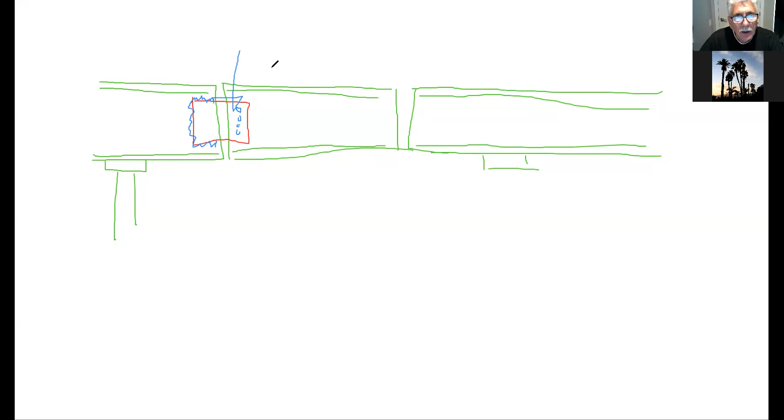So the first thing we do is we try to determine how many bolts we will need to connect the beam to the plate. So we know that we have a VF force of 333 kilonewtons. And if we assume that we're going to be using 3/4 inch diameter A325 bolts, and that the threads are going to be intercepted, then if you go to the table, the VR for this is 79 kilonewtons per bolt with threads intercepted.

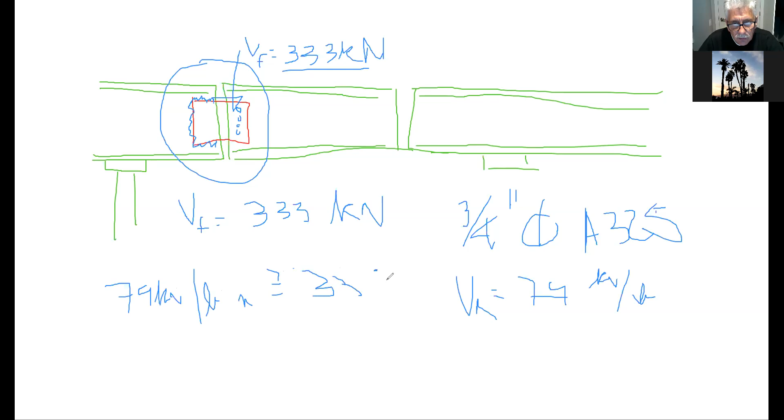So therefore, if we have 79 kilonewtons per bolt, and N is the number of bolts, N times 79 should be greater than or equal to 333 kilonewtons, so N is going to be 333 kilonewtons divided by 79. And I did this and I got about 4.2 bolts.

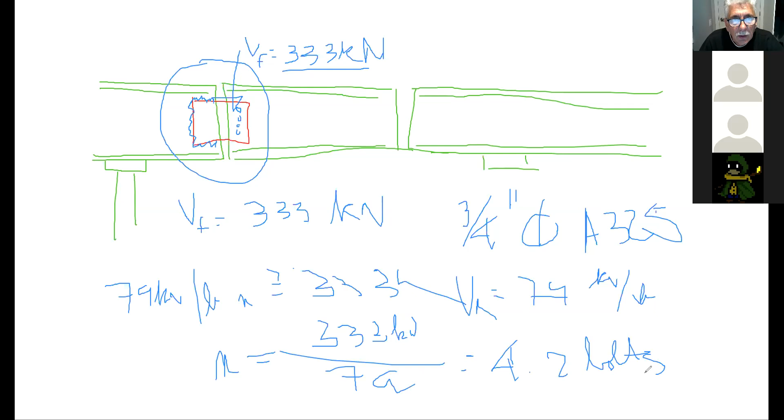Sir? Yeah. Can you tell the numbers again, because I can't really read what you just wrote. Well, as I'm writing it, you should be writing it down also. I know, but I don't really.

Okay, so in other words, this is my VF force at the end of the beam. That's the highest one, 333 kilonewtons. We're going to be using 3/4 inch A325 bolts. The VR, if you assume that the threads are going to be intercepted, because you're not sure, is 79 kilonewtons per bolt. So if I want to determine how many bolts I need, I take 333 kilonewtons divided by 79 kilonewtons per bolt, and I end up getting 4.2 bolts. So I'm going to use at least 5 bolts, a 5-bolt configuration.

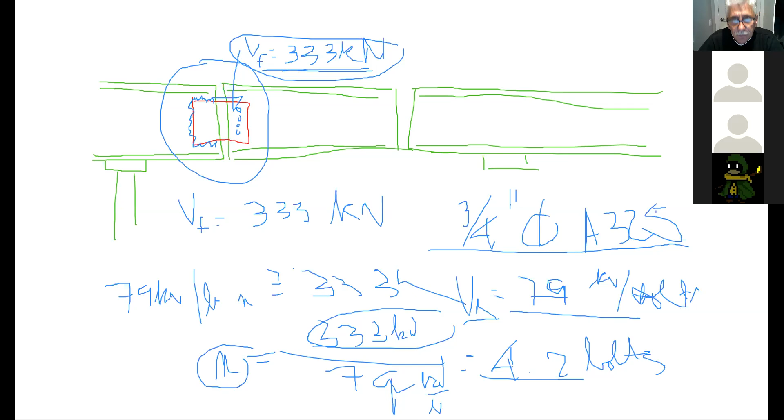Right. Okay. Now I'm going to erase all of this. So now the next step is working out some kind of plate size. I'm going to try to draw this. Sorry? So there's 5 bolts on the plate holding it? Well, we're going to be putting 5 bolts to attach this beam or this girder to this plate.

Now I'm going to try to draw this. What color should we draw it in? Let's draw it in.

Sir, is that going to be the same for either side of the drop-in beam? Yeah, whatever I design for this side will apply to this side, because the VF on this side is just slightly higher than the VF on that side. So I want to get the VF right across the whole thing. I took the highest VF value of 333. So whatever I'm designing here is going to be the mirror image on this side, and whatever we're doing here, we'll be doing on the other end, the other side of the girder. It's all going to be the same.

Thank you. Okay, so now I'm going to try to draw this so that we can refer to it quite a bit. So I'm going to try to draw this. Okay, so this here... I should have made this a little bit longer.

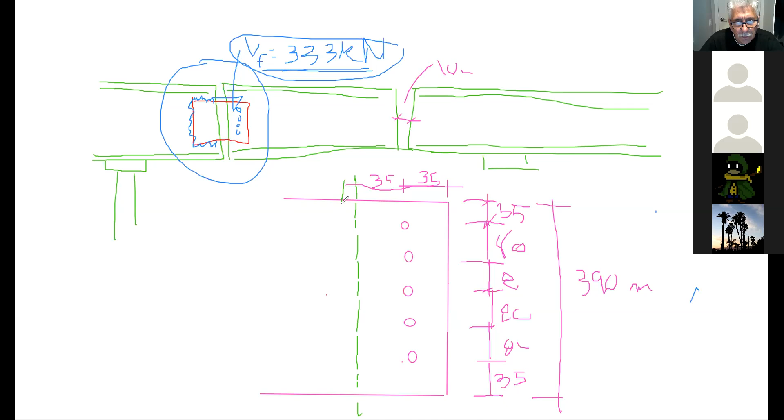And of course, where the beam is going to end here - I should draw this in another color, green, so it's consistent. So where this beam is going to end here, and here, so on, okay. So here I'm going to leave another 35 millimeters. Now the standard distance you leave between these two things is about 10 millimeters. So I'm going to leave 10 millimeters to the edge of the next beam - here's the next beam next to it.

And this, guys, is a question of choice - there's no real rule. So I made this length here 80 millimeters.

Sir, I'm having trouble visualizing what that green dotted line is. That's the edge - sorry, I should use green with green. This line here represents that line there, and that line there represents that line there. In other words, that's where the two beams are next to each other, and this plate's going to be connecting the two beams together. Okay, thanks.

So now what I have here is I've got one dimension, and I've established the other dimension. Now what's going to happen here, I'll do this in blue probably. How's that?

Sorry, sir - that 80 millimeter that you just drew, until the end of the plate, like until the end of the weld? That's what I'm getting at. So this is going to be completely welded here, until the end of the plate. This is a weld here, so it's all welded up to the end of the plate here. Let me go back to green so you guys can see - remember this here, okay?

With this, I can start determining, based on the fact that I have to transfer 333 kilonewtons, what size of weld I need here in order to resist that 333 kilonewtons.

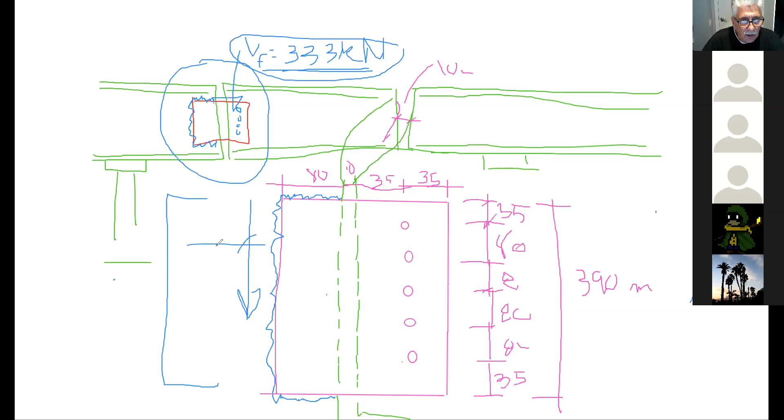So you've got all kinds of different ways that this thing gets subjected to forces. What the handbook does is give you a very nice table on how to calculate what this weld size has to be based on your geometry and all that. That's what I'm going to show you now.

I'm going to stop sharing this. Mind you, this is going to be messy. I'm going to show you something, I should have sent you this but I sent you only one.

Okay, so this is one of the pages in the handbook. This shows a whole bunch of different weld groups. Here's one of them, let me get to it.

So here, if you can determine, for example, what we have right now is this value from our geometry. We can determine the value of K, because we know this length here. We know from our geometry that we have a length of 80. I'll do it here, it's better, and I like to change color.

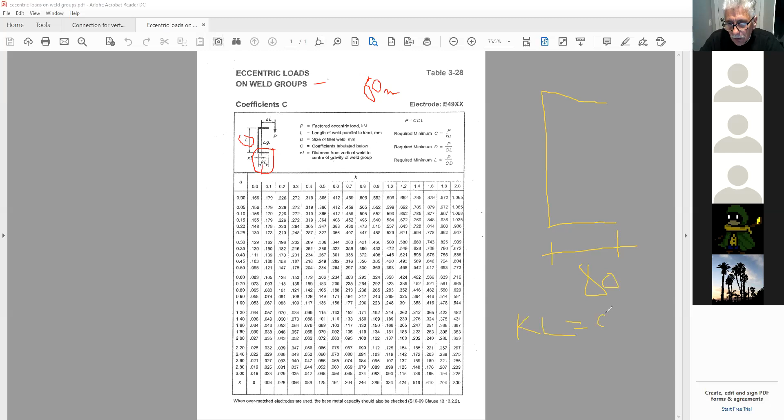I made it 80. Now from here, I know that KL is equal to 80. In other words, it's equal to this dimension here, and this is 80 millimeters. L, of course, is the length of my weld, and that was 390. That's where we figured out the length of the plate, the height of the plate, 390. So K times 390 millimeters is equal to 80, and therefore I can determine my K value. So K would be 80 millimeters over 390 millimeters, and it's just a ratio.

If I do the math on my calculator, 80 divided by 390, I get approximately 0.205, but let's say we have 0.2 for K. So that means here are all my K values, let me just change color. Here are all my K values, and I have a K value of 0.2.

Now if you go to the bottom of the table, it tells you what the value of X is at the bottom of the table. So once you determine your K, you go to the bottom of the table and you get your X value.

Once I got my X value, it's going to allow me to calculate this little distance here. Basically, if I want to calculate where the centroid of my weld group is with respect to the edge, that's going to be X times L. So to calculate this little distance, X times L is equal to 0.029 times my L, which is 390 millimeters. So that little distance from the edge to the center of gravity, X, is going to be equal to 0.029 times 390. So my X value is going to be about 11.3 millimeters.

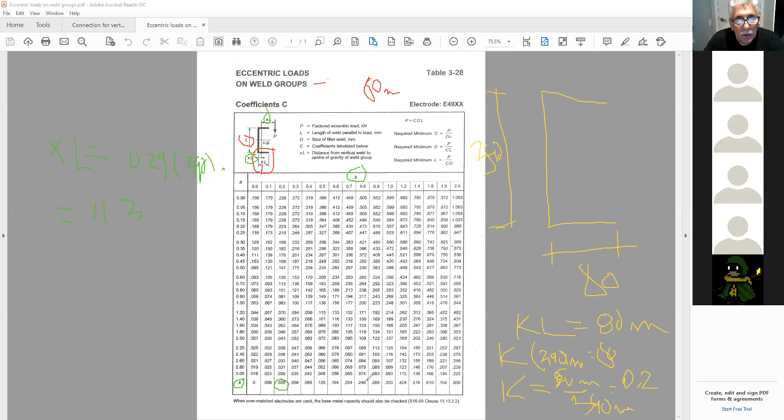I think it's supposed to be 113.1 instead of 11.3. It can be—0.29 times 390 gives you 113.1. Oh, it's 0.029? My bad, I didn't put the first zero. But if you look at the bottom of the table, it's 0.029. It couldn't have been more than that anyway, since it cannot exceed this length here—right now we only have 80, so the center of gravity of this group cannot be out here somewhere.

That's number one, good, thanks. Okay, so 11.3. Now that I've got that, 11.3, I can go and calculate my A. How do I calculate my A? Well, it's very simple—I look at what I had in terms of overall length.

This is my force P. I know that I left 35 millimeters there to the edge of the member. I had 10 millimeters between the two beams, and then after that I came over a total of 80 to the end of the plate. We all agree? So therefore, what's my A value?

Okay, so my A value, I'm going to do it up here. A would be equal to 80 plus 10 plus 35, minus 11.3—in other words, I'm taking away a little bit from there. So I get 80 plus 10 plus 35 minus 11.3.

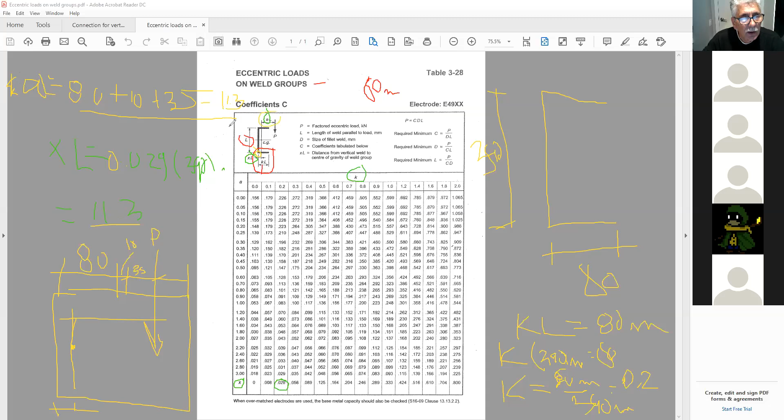So A is the distance from... No, you're calculating A—you're trying to calculate this length here so you can go and evaluate your A. So right now, this is what we're doing. I should have put LA here, or AL. AL is going to be equal to this value here. I'm trying to calculate this length, which is 80 plus 10 plus 35 minus 11.3. So that gives me 113.7.

In other words, the distance from the center of gravity to where the load is acting is 113.7 millimeters. Therefore, if I divide this by my L of 390, I get my A value. A is going to be equal to 113.7 millimeters divided by 390, which gives me approximately 0.3. It's actually 0.29, but I'm going to use 0.3.

Now that I've got my A value and my K value, I can go into the table and find my C value—that's what the table gives me. So here is my A value of 0.3, here is my K value of 0.2, and therefore my C value from the table is 0.196.

Now, if I want to determine the minimum size weld I need, I can take my P and divide it by my C and my L, and that will tell me what size of weld I need to resist that force. So to calculate my D: D is equal to P over C times L. That gives me 330 divided by 0.196 and divided by 390, which tells me the minimum size weld I need in order to resist that force.

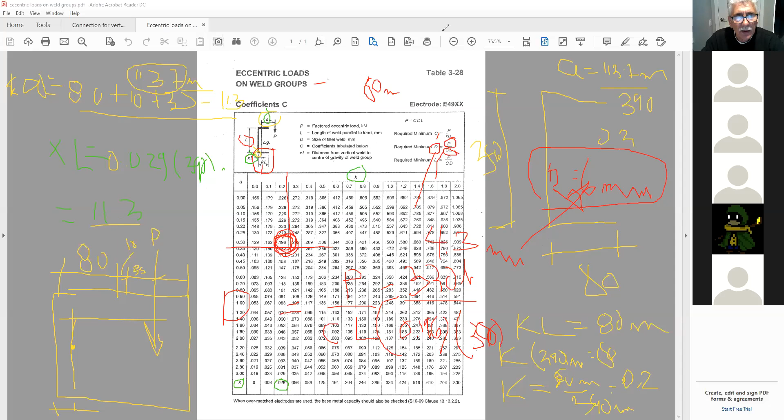I hope you guys have this all down. Anyways, it's being recorded. You'll be able to come back. If you don't, you can listen to me. So that's what I got now. Now I got my D. I'm going to stop sharing this. I'm going to clear this now. Okay. I'm going to stop.

Sorry. Yes. I just wanted to know, when you find your D, when you use your equation P over CL, the units aren't supposed to cancel? You're talking about this equation here? Yeah, like the units don't cancel? No, because this is in kilonewtons; these are empirical formulas, you understand? Empirical formulas that they develop by experimentation. The only time the units work out is when you're looking at these ratios here, A, K, because that's the only time the units cancel out, okay?

Okay. The C value is in kilonewtons per millimeter? Well, here it just says coefficients tabulated below, that's what C is. D is the size of your fillet weld in millimeters. So if you do it correctly, you'll end up getting a D size in millimeters. L has to be in millimeters, and P has to be in kilonewtons, that's what we've been using. XL is the distance of the vertical weld to the centroid. So as long as you're using all the correct units, our D here is going to be in millimeters. The table has been based on those units, okay?

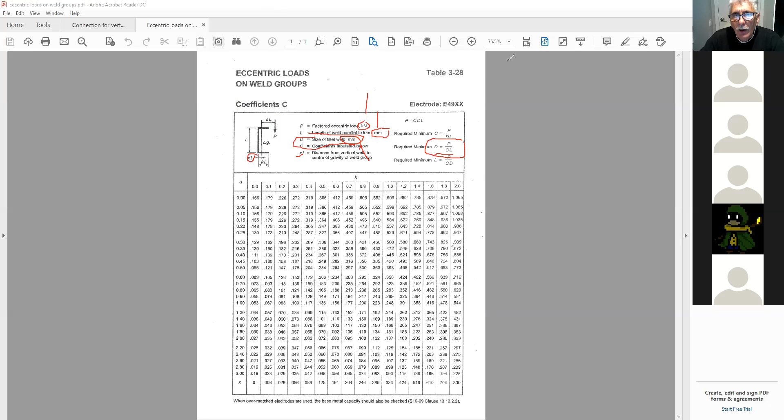So now I've got my D, right? Now I'm gonna stop sharing this. I don't need this table anymore. I know I need a D of 6 millimeters. Stop sharing. Let's go back to, where were we? Oh, did I?

Oh, I lost my drawing, right? I did that on the whiteboard, right? No, on the whiteboard here. Share. Well, here we go. There we go. Okay. So now, guys, we're back to this, and we'll use this to do our calculations. I don't want to redraw this. It's kind of hard.

So now, I know that D is going to be equal to 6 millimeters. And I know that according to good weld practice, D should be equal to the thickness T minus 2 millimeters. In other words, the weld size should be 2 millimeters thinner than the material that I want to use. So therefore, the thickness of the plate, T, is going to be equal to 6 plus 2. So I'm going to start with an 8 millimeter plate. So now I've established the thickness of my plate.

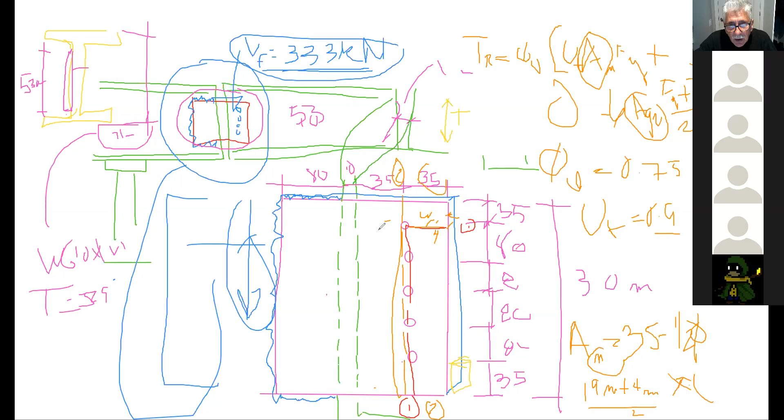Now, this length here is your value of AGV, your gross shear area, and basically that's going to be 80 plus 80 plus 80 plus 80 plus 35 multiplied by your thickness. That's your AGV. You put all the values into your equation, and if that TR value is greater than your VF value of 333 kilonewtons, then we know that this is not going to be a shear problem. So that's check number 1. Sir, do you mind repeating TR, please? If what?

Do you mind repeating TR, please? TR is the equation. In a sense, TR is phi in big brackets, U T A N F U plus 0.6. You find this in your notes, you understand? Yeah. 0.6 AGV times FY plus FU divided by 2. That's the formula for block shear, okay? So that's where you get that equation there.

Now, I'm going to erase some of this stuff that's getting very messy. Let me just erase some of this stuff. Okay. Now, after that, you're going to be checking for failure plane number 2-2, and that's basically going to be very simple because all you have is an AGV here for 2-2. So this can be very easy to do.

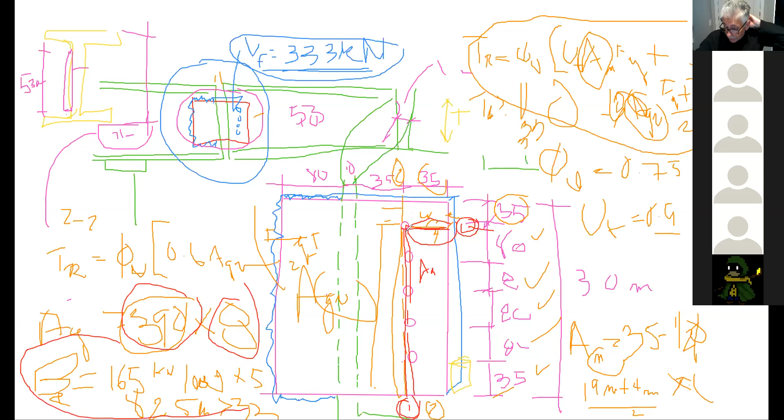Okay, do you mind going through the calculations again? Because I can't read it. Well, you're going to get the video, you're going to listen to the video. No, but sir, even if I go back and watch the video, I still won't be able to read your handwriting. Oh yeah, but what you do is you start the video, you listen to my voice, you stop it, you write down the value. Okay, never mind. Is that okay? I mean, which numbers do you want me to go over? I can go over any number you want. It's just that it's very hard to write with the mouse, you understand?

What's the value of FU? Well, if it's 300 FY, the FU is 450. All right, thank you.

Now, Jared. Okay, so is there anything you want me to go over right now? This way I can clear it up for you, because I know it's a little bit messy. No, like go over your notes and tell me which parts you don't have, and we'll fill in the gaps. I guess just TR for section 2.2. If you could just walk through that one more time.

Okay, in other words, for this one here, right? Yes. Well, look, Jared, I'll try to make it a little bit neater. It's just like I'm trying to get through it. Okay, don't worry about this. We have time. So let me erase this here, okay? Like the equations, unfortunately. So you want me to go for 2.2 here, right? Yes. Okay.

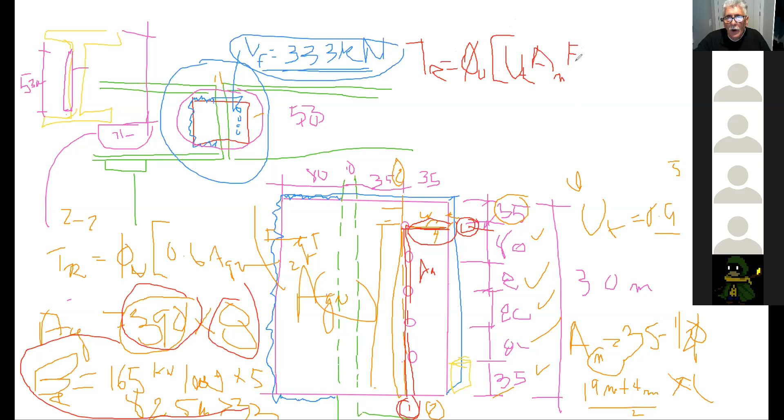So first of all, Jared, when I have block shear, it doesn't matter how it's going to block shear out, but the equation is TR for the block shear is equal to phi U, big brackets, utility factor UT, AN, FU, plus 0.6 times AGV, FY plus FU over 2. Do you recognize the equation?

Yeah. Okay. So what this equation does is that when you have block shear, in other words, when something can pull out as a block, the first thing you have to worry about is which side of that block is in tension and which side is in shear. So for example, if this is being pulled out here, then this side here is being pulled away, so this becomes tension. Since this is tension, it's only this side of the equation that contributes to the resistance.

Here, because it's being pulled here, I have shear here. I'm going to change color for shear. Let me just erase this. Okay, so here what's going to happen is I have shear, and so the material is resisting in shear. So once I can calculate this length here and this length here, it's this side of the equation that contributes to the resistance. Is the equation clear now? So this is for all the segments that are in tension. These are all the lengths that are in shear.

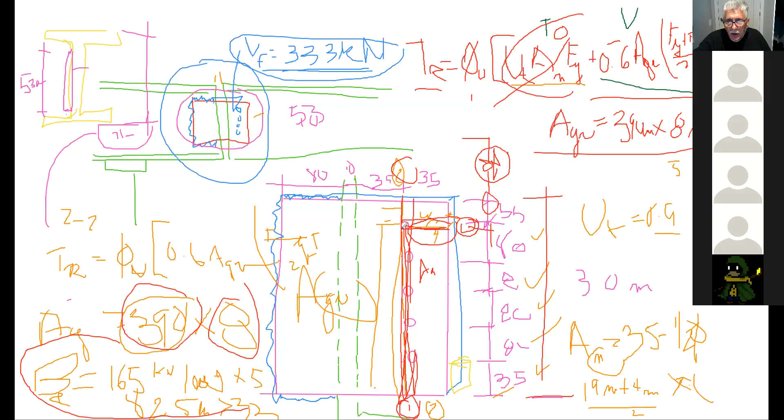Did you understand? Now do you understand why for 1 we add this little part here, because we have a little section of that block shear that will be in tension? Yeah, and that's why we have this little section here. So when you look at this equation, first you determine which segments are in tension, which are in shear. That's the first thing you have to determine. Then once you see that, you can plug in the values into the equation, so you'll know what to calculate for AN and what to calculate for AGV.

Okay, thanks. Yes, next question. Just want to be sure, but we chose the FY to be 300 MPa, right?

In this case, the plates are still being produced in 300 MPa, so you use an FY of 300 MPa. Thank you. As a matter of fact, the beam's going to be 350, so it would even be higher, so I'm not worried about the beam failing in shear. So should I stick with 300? Yeah, because you're always calculating for the weakest element in your connection. In this case, it's not the web, it's the plate itself. Oh okay, I see, all right.

Okay, thank you. Okay, so is that clear? You got everything here? Because what I did after that—okay, I want to talk to you about the other connection. The other connection I want to talk about today is, of course, the connection you're going to have to make for that vertical brace. And I sent you guys a PDF through Leah, but I'm going to pull out the PDF. Okay, I'm going to clear the drawing. Stop sharing.

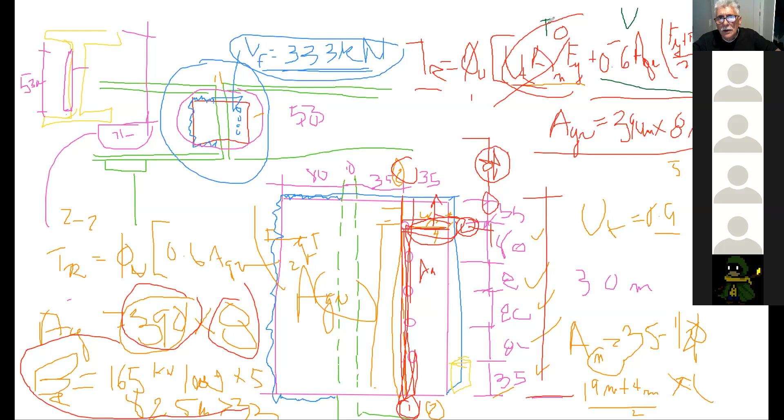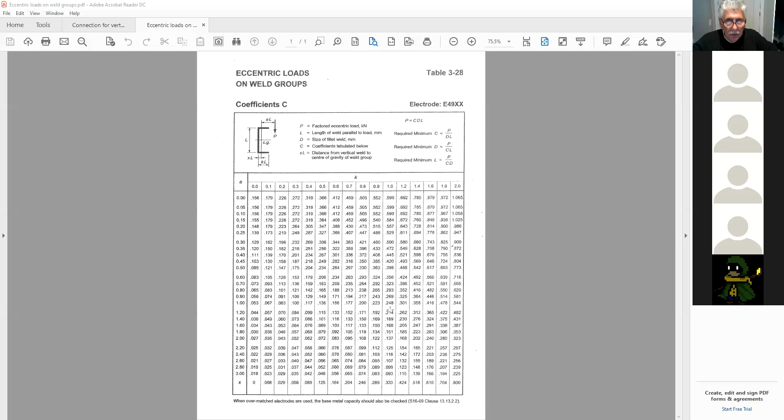Okay, where's my PDF? There's my PDF. Now, this is what I sent you guys through Leah. This is the example that I'm going to go through with you guys so that you know what to replace in here. But this is what you're going to have to do.

Let me try to draw this so you guys can relate to this diagram. Okay, so remember we calculated the two vertical braces here, and you guys were supposed to have sized them already based on the fact that this was in compression and you had a length here of so much. And somebody told me—does anybody have the size of the HSS for their brace here?

If you don't, well that to me is very secondary. That's something you're going to have to go and determine. So here, this is your HSS, okay? Not this one here—what exactly are you doing right now? This is the braces, the vertical braces for the building. In other words, you're going to have to be able to connect these braces to your structure. You want them to work together.

So I'm trying to show you how—this is the example you're going to use to be able to do that, and you've got all the information. We've done everything in class. So here I'm just giving you the steps, like this is a good example. So for example, if this is your HSS that you're going to be putting diagonally, the vertical brace that you're going to be putting diagonally to brace your building, what they're saying is that you're going to have to put a plate in here like this, and then that plate is going to be joined to another gusset plate that you're going to be welding to your column here.

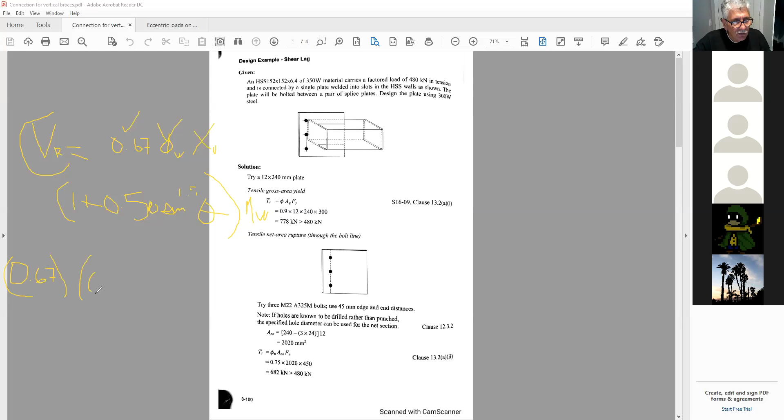The phi W is also 0.67. That's the reduction factor for welds. The XU is 490 MPa, that's your XU. This term goes to 1 because the sine of 0 degrees is... well, this goes to 0 here, therefore this only becomes 1. If I do sine of 0, that's 0, so this goes to 0.

I have 1. And here the Mw is very simple, I don't have a weld group, I only have a weld there and a weld there, so this goes to 1. So that's the value of the weld per millimeter, okay?

Oh yeah, sorry, the area of the weld, I forgot the AW. Where's my AW? Okay, now what is AW? It's very simple, I forgot the AW. I got 3 millimeters there, and therefore this is the area of the weld. Therefore that value there is...

0.707 times 3, okay? And that gives me times, of course, the length L, okay? And that's what you want. This is per millimeter weld.

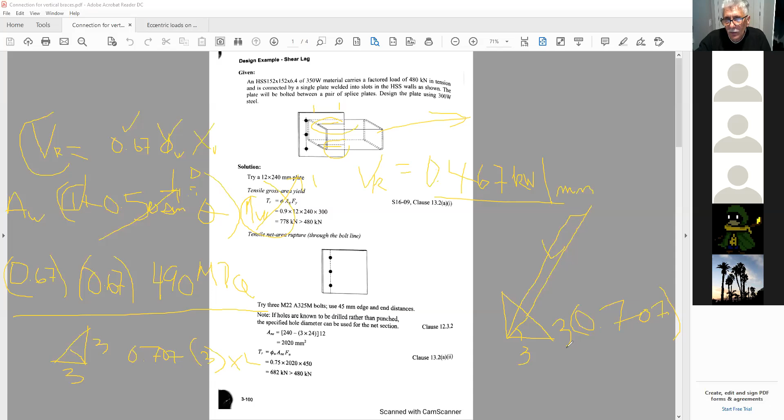Well, because he said he had an HSS that is 114 by 114 by 3.2 millimeters. And therefore you should not use a weld that is bigger than the thickness of the material, otherwise you might burn right through it. Right, and since he has 3.2, we're going to use a 3 millimeter weld. And since the table didn't have the VR value, we just calculated what the VR value is for a 3 millimeter weld. Understand?

Okay, so Vincent, do you understand how I got this length here? So it's 0.707 times 3? Yeah, like on your calculator. This is just math, okay? So in other words, when we're talking about a 3 millimeter weld, this leg here is 3 millimeters, and that leg here is 3 millimeters. You agree? And the area of the weld is really the length of the throat here, right? Yeah, okay, makes sense.

So this is 45 degrees, right? So this is the hypotenuse, therefore it's either the sine of 45 or the cosine of 45, they're both the same, which happens to be 0.707. Okay, 0.707 is the cosine or sine of 45 degrees, and you multiply that by the hypotenuse of 3 millimeters, and that's going to give you the length there.

Does that make sense? Yeah, 2.121 - that's the length of the throat of your weld. So here you have to multiply by your length, and for each millimeter you get, that's going to give you the resistance we calculated, 0.467. Now if I look at the table, a 5 millimeter weld gives me a value of 0.778, and a 3 millimeter weld gives me a value of 0.467. I think we're pretty much on the right track.

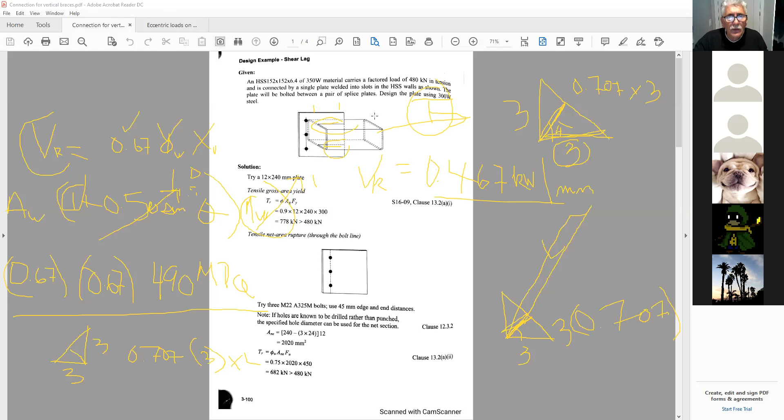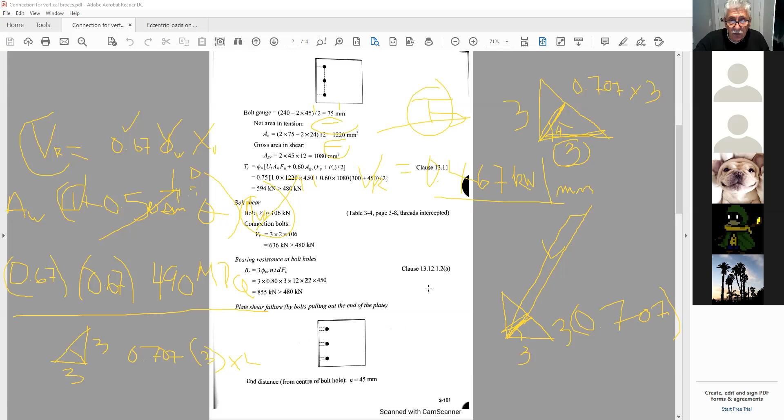Now, this is just to show you the things you have to check for, like the block shear here, the shearing across here. It all depends on the number of bolts that you're going to need. Like I said, if you calculate the number of bolts and you end up with one bolt, make sure you provide at least two - you never put a one bolt connection. I would actually calculate the length that I would need, and then use multiples of 10. Here they're just showing you that in this case, this is what they needed.

So the length of the weld is exactly like we did in class this morning - that's all you have to do for the length of the weld. If I redraw here is the HSS. Here's a plate that I'm going to be inserting into the HSS like this. I'm going to try to draw it so you guys can see it. So here's my HSS, and here's a plate that's going inside the HSS. Does everybody understand what I'm trying to draw here?

So basically what's happening is that this plate is going to - if I look at a plan view of the HSS, this is the HSS here. They're going to cut a slot in here like this, and then they're going to be inserting your plate right in here. This is going to be the plate, it's going to go right in here. And then what's going to happen is it's going to be welded here, and welded here, as well as here and here. So therefore you're going to have 4 weld segments, and I can multiply that value by 4.

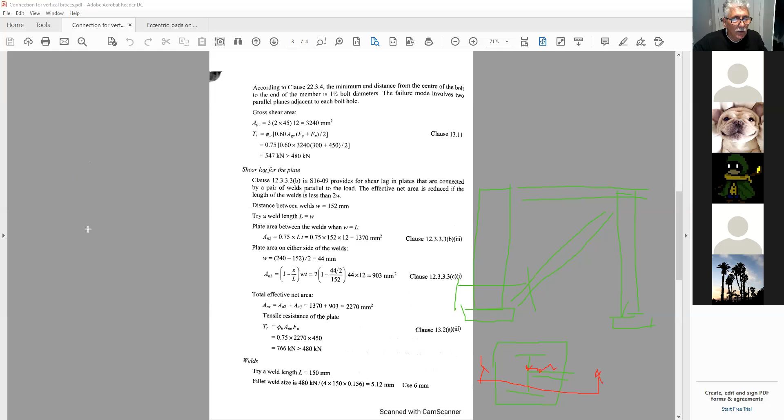So here is the edge of the back flange of the column. And of course, here I've got my web member. I got the web of the column in here. And all of this is sitting on a base plate. So basically, my gusset plate is going to be going, change color so you guys can see this.

Okay, so my gusset plate is basically going to be something like this, that you are going to weld here, and then it's going to have 2 holes, so that when you come and put the plate for your HSS that we just designed, they'll be able to be connected together. If you go on the sample drawings, I think you'll see how that detail works.

As a matter of fact, let me go get the sample drawings. Might as well look at it right now. Okay, so I'm going to see if I can go get the sample drawings here.

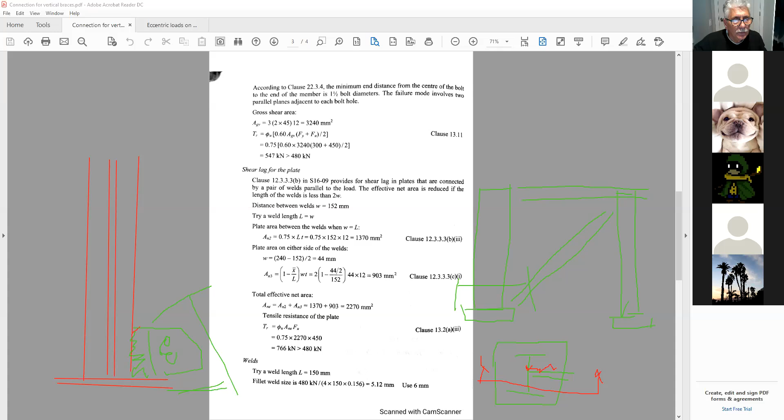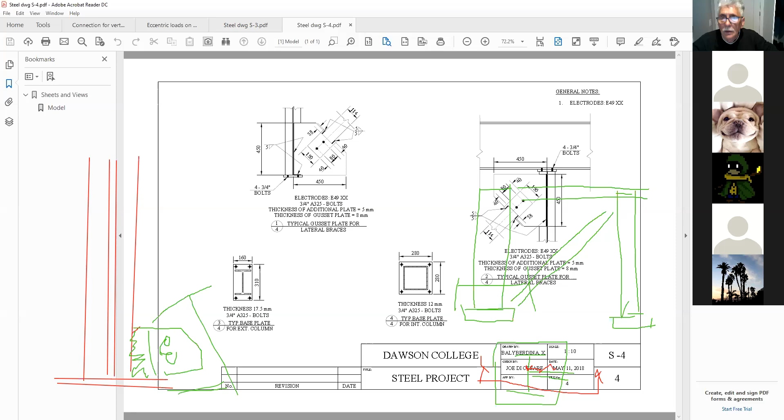No, not there. I'm trying to find where I put those lines. Oh, here we go. I don't know if it's on drawing number 3 or drawing number 4. So it's not on drawing number 3, but drawing number 3, guys, there you see the detail. Let me clear the drawing. Sorry, I haven't shared this yet, but I'm gonna, hold on. And I'm gonna get drawing number 4 at the same time. Okay, so here you go. Let me clear. Okay. Where's my PDFs? Okay, so where am I now? I can't seem to find my PDFs. Oh, here you go. Share.

Okay, guys. So this is the typical drawing. So this is what you're seeing right now. Now, here in this case, what they did is they put the bolts one behind the other. Okay. Well, you know that in your case, you can really modify that. Annotate. Okay, so here she decided, I think this was Xavier, she decided to put the bolts like this. You guys can put the bolts this way. Okay, so you don't have to do this.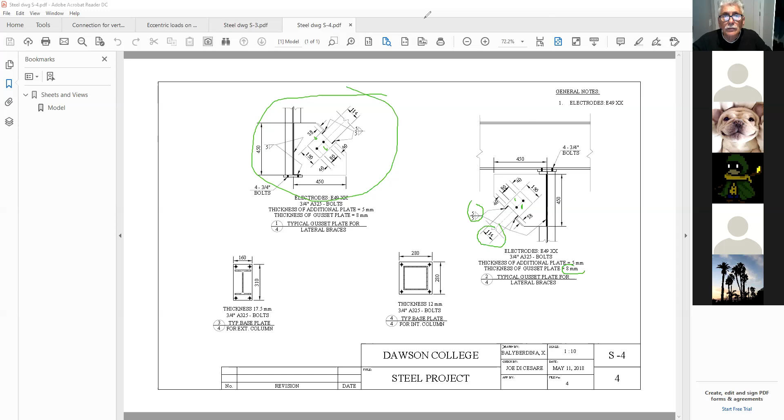And this is the plate I was telling you about. She decided to use a 5mm weld, right? And thickness of additional plate, 5mm, thickness of gusset plate, 8mm. Anyways, so this is your brace here, 114. So she ended up getting 114, but I don't remember if it was 114 by 3.8. And this is how it's going to look when it connects to the top of the column, and this is what it's going to look like when it connects to the bottom of the column. So in your case, we decided to put the bolts side by side, so this is going to be slightly different.

Okay, now for drawing number 3, here's a detail that she got. This is the detail of the Gerber, okay? She ended up getting 8mm. We decided to get an 8mm weld also, okay? And she put the same thing here, except she got 3 bolts instead of 5. So we ended up getting 5. So this is very similar to what we have. And that's the detail how to join this, the drop-in beam here. So this is the drop-in beam here, okay?

And this is the girder on the other side, and that's the cantilever side, and that's what we just finished calculating here, okay? So I don't know why she made these lines extend all the way here. I probably penalized her for that. And she kept the same dimensions that I told her to keep. In other words, the edge distance. So we ended up getting here 390.

Okay. And of course, the best thing to do in this case is you should actually draw this to scale, like nominal scale. We know that this is 610, and therefore we know the thickness of the flange, so we can find that out. And you should put this right in the middle between the top and the bottom flange, okay? That's where you should center that so that it's as close as possible to the shear center of the beam, so it can minimize the effects.

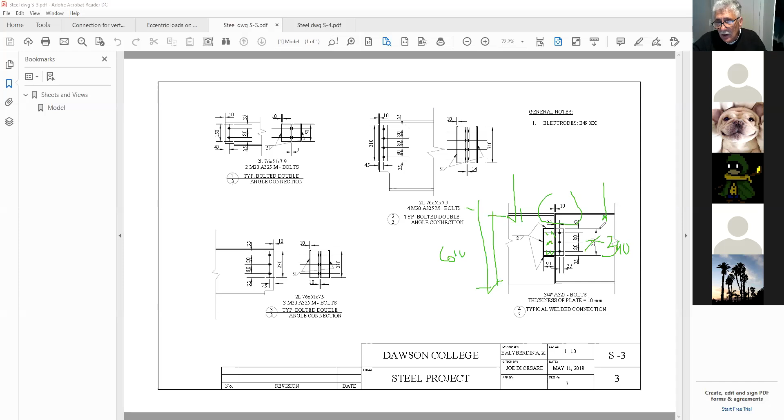And that's it, guys. So there is a detail that we just calculated for ourselves, where we end up getting 390 as opposed to 230. So she might have calculated this with the threads being intercepted. I don't know what kind of Vr she had here. I don't remember that, okay? But there you go. So that's the detail that we just finished doing today. And on the other page is the detail for the HSS.

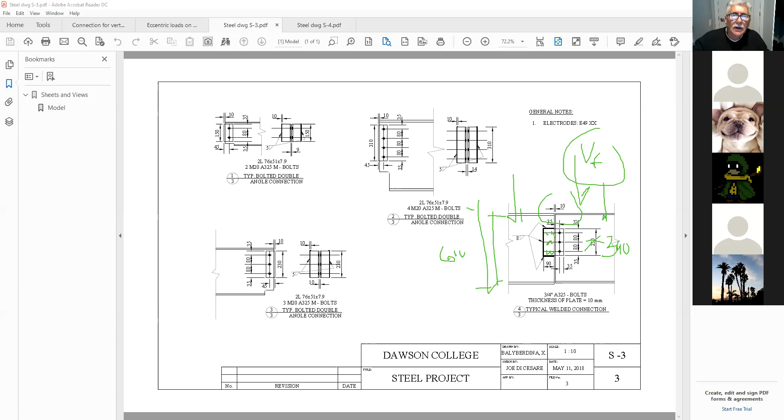So the only thing that's left for you to calculate is the size of the plate that you need. And let's see what she used for the plate. You might as well use that as a trial section also. She made the gusset plate 8 millimeters. Well, you can try an 8 millimeter plate. I would try a 6 millimeter plate. I think that would work. I wouldn't even go to 8.

There you go. Yeah. You see, she didn't dimension where her holes were, so I probably penalized her for that. Guys, these drawings, they're just one student handing in her drawings, and then I went and I made corrections. So

17.5. See, and I probably penalized her for this because she put a 17.5 millimeter plate. There's no such thing as a 17.5 millimeter plate. It's either 18 or 20. Use a 20 millimeter plate for the exterior columns.

And then on top of that, okay, this here, keep in mind that although we don't get into it, if this is 310 here, that means that her foundation wall would have to be 12 inches thick if she wants to be able to use this detail. If you don't want to, I just want to show you something here on this detail.

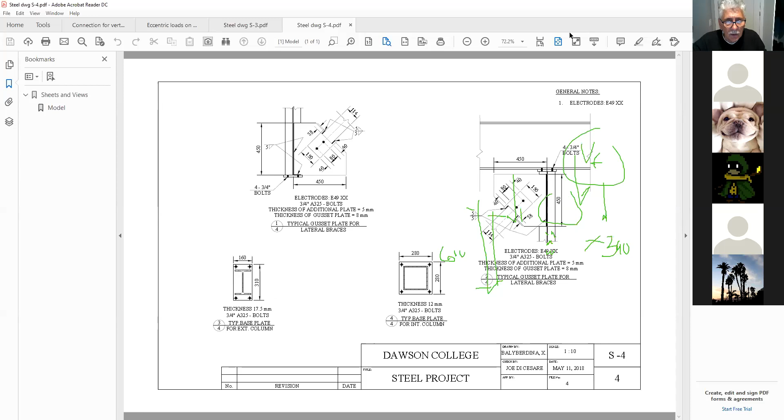Okay, you can put the anchor bolts on the inside here. You don't have to be on the outside. Oh no, wait. Yeah, they do have to be on the outside. Sorry, they have to be on the outside because this one has the bending one. Sorry, so that's correct. Not a problem.

So guys, this is pretty much it. And then next week, just to give you a heads up, we're going to learn how to calculate those double angle connections. That's going to be the lecture, and that's going to be the last thing for you guys to calculate. And after that, it's just finalizing your calculations, finalizing your drawings, and the project's pretty well completed.

Is there any question, guys? Now's the time to ask. If there's anything on the drawings, now's the time to ask. Just tell me what you want me to go over. I know Subitan wanted me to go over the web quickly. I can do that now if there's no other questions. Subitan, do you want me to do that now?

Oh, it's up to you. No, I mean, listen, we have time. I've already pulled out the PowerPoint, so it's not going to be a problem to show you what we have to do. I need you to give me some values, understand? So we're going to have to do this, and I don't have the values with me. But before I move to the web crippling, are there any questions on what we did today?

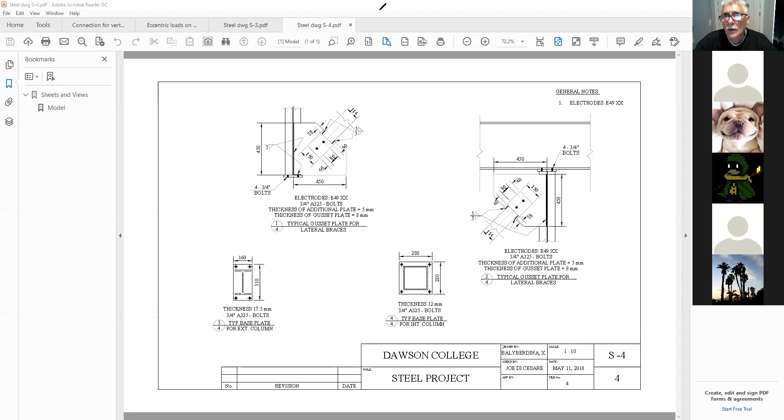Wait, one second. The VR that we designed for the 3 millimeter HSS? Yeah, well, no, we calculated VR for a 3 millimeter weld. Yeah, that's it. And we had 27 millimeters for the length of the weld, right? 27, right? Yes. Is that the end of the calculations, or do we also have to do all those calculations for the shear?

Well, then you have the other calculations that I gave you in that sample sheet that I sent everybody. You have to calculate the thickness of the plate required. Okay, that's for the thickness, the sheet you gave us. Exactly. And I'm telling you, Vincent, try a 6 millimeter plate. It will most likely work. Understand? Okay, thank you. So start with a 6 millimeter plate. You've got all the geometry now, right? I gave you all the distances, right?

Yeah. So we're all on the same page, let me just share this screen here, so you guys know where you're going with this. So right now, what we've established is this. Here's our HSS that's going to be going up. That's our HSS. And now we are going to have that's our plate that we are putting into our HSS, right?

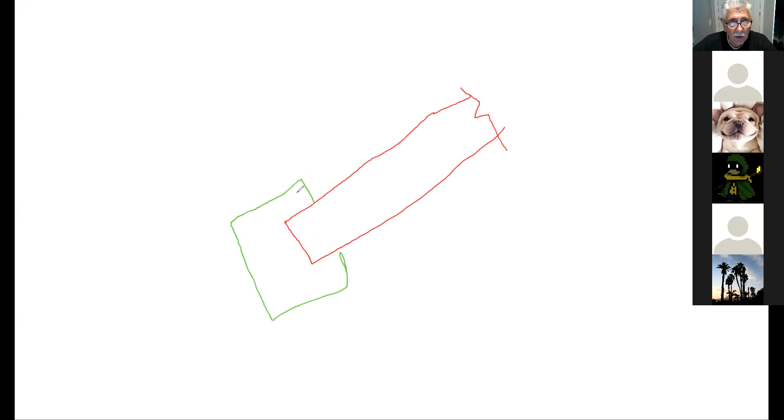So far, so good. And what we've established so far is that we need to provide here only 27 millimeters of weld, but we said that good practice should be at least 1.5 inches, so make this 40. Okay, so that's going to be 40 there.

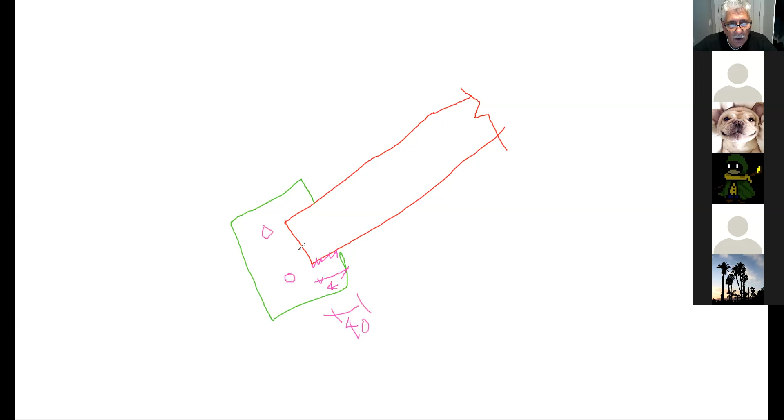Then, so that's the weld there. Then we said we need 1 bolt, and it's good practice to have a minimum of 2 bolts, and we said we're going to be putting them side by side here, right? And of course, the good practice is that from here to here to here, we should have at least 35 and 35. So far, so good. So 35 plus 35 plus 40, now I've already established what the length of this plate here is. So that's 70 plus 40, this is going to be 110. So far, so good, right?

Now we know we want to keep here an edge distance of 35. We know we want to keep here an edge distance of 35. And we want to keep here a distance of about 80. So that's 70, so this one here happens to be 150. Okay, and we know that this here is what? 114. So therefore, this leaves here 150 minus 114 divided by 2. So this leaves me about 18 millimeters here. And so therefore, I have ample space here to put this weld in here and the weld in there. And there's your geometry for your plate. Okay? So when you're doing the calculations, you just take this geometry and you just check your TR values.

Perfect. Thank you. So guys, here in this case, it's basically the good practice that established the length of my weld. It's good practice that established, for example, that I only needed 1 bolt to resist that force, but good practice says you should have a minimum of 2 bolts, so I'll put 2. And guys, if this thing is twice as resistant as it needs to be, who cares? As long as it's not less, that's all I care about, okay?

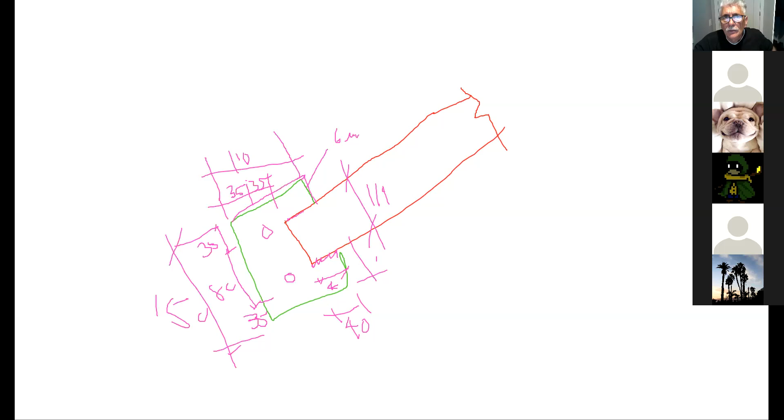And now, like I said, as a trial section, try a thickness here of 6 millimeters, and it should work. It should work. And if it doesn't work, well, then you move up to 8. But I believe that 6 should work. Okay, so what we'll do is we'll move on, Subitan, we'll move on to the web crippling. Okay, so stop sharing and

now, Subitan, here is the formula for the web crippling, okay? Sounds good? Now, we need to have some information. So, let me just, okay. Now, there's 2 things that can happen. So what I need to know is what is the CF force that's going into the column. And that was, like Andrew said, about 800, and whatever you designed the column for, that's the CF force that's going across here, okay? In other words, if this was a wood class, this would be your QF value, okay? And these give you what we call the QR values, okay?

But they're called BRs. Now, here, this is simply a reduction factor, which is 0.8. This is the thickness of the web. So therefore, you've got to take the W610 by 113. Okay, and this is the one that's sitting on top of there. And you've got to go find the W, in other words, the web of that beam. Okay. N is the length that you have.

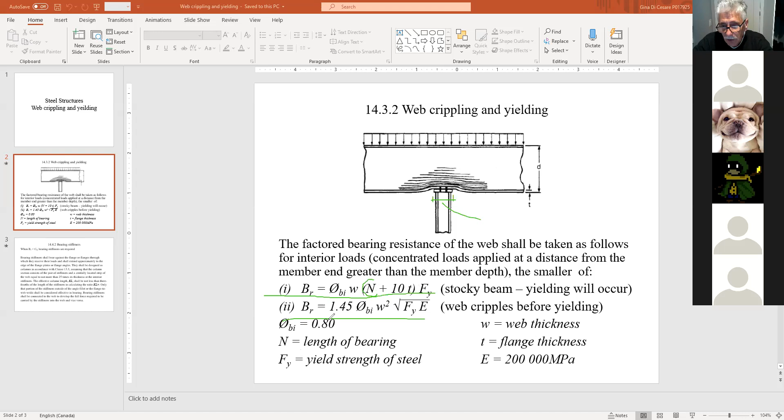And then after that, the T is the thickness of the flange, W is the thickness of the web, and then the phi BI is 0.8. So write down both equations. Go find the values of W and T, and of course the N is something that you have to work out, because you have to work out the size of your base plate, and that's what you use for your N for the top. We evaluate both equations, both BRs, and if they're greater than your CF value, then there's no stiffener required for your web.

Sir? Yes. Do we have to do this for both the exterior column and the interior column? No, because the exterior column, okay, you're talking about the one at the wing column? Yeah. No, because I'm pretty sure that for the exterior column, the wing column, the load is so little, right? The exterior column. In theory, I would check it if I was doing a real project, but no, I want you to just do it for the interior column. If you can do it for the interior column, then if one day you happen to have another situation, just do it for the interior.

But in theory, if I was doing this for a project, I'd also check it for the exterior. Just do it for the interior. Because if you do it once for me, I think that you'll know what to do, and if ever you need to do it again, at least you'll know where to start. How's that? But in theory, yes, we should also be doing it for the exterior column.

So the only thing we have left to do is to design the double angle connections, right? That's it. And then, guys, we're done. The calculations are done, and after that, it's just finalize the drawings and put everything nice and neat together in a nice little package and ship it off. Great. How does that sound? That's perfect. I don't know about you guys. Like as of the end of today, I'm starting to see the light at the end of the tunnel.

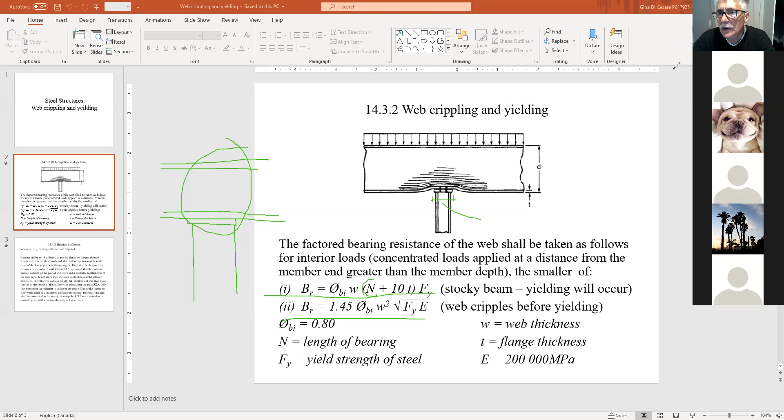Now, I don't know if you guys ever notice this, but whenever you have to plot your drawings to PDF, you've got to pick some kind of plotting device. You can plot them to Microsoft Print to PDF, or you can use this one here, AutoCAD PDF General, which is the one I like to use. There's a whole bunch of PDF options, so you can use Microsoft PDF, whatever.

So let's say we were doing this to a PDF drawing like this. Then the next thing you need to do is find your piece of paper. This is a full bleed, meaning they're going to stretch right to the limits of the paper. If you don't want a full bleed, you take just a regular 8.5 by 11, but I'm just going to leave it here for now. It won't matter. Full bleed, 11 by 17.

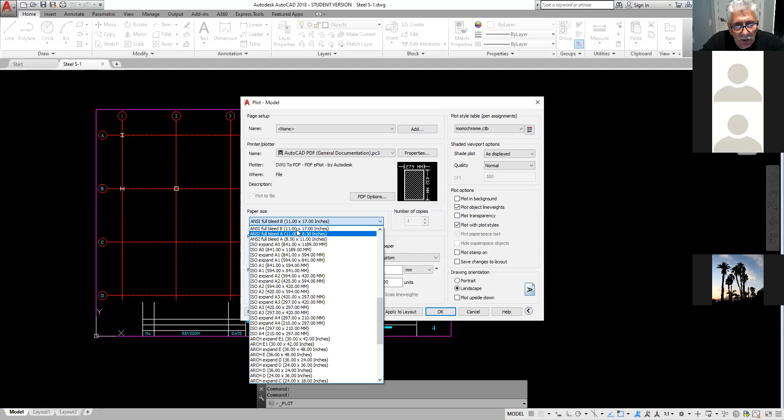Now, I want you to notice that if I hover over here, over that little screen, you see the paper size? 11 by 17. But right underneath it is the printable area. That's what the program is going to use to establish the area of the paper it's going to use to put your drawing on. So the printable area right now is 10.94 inches by 16.94 inches.

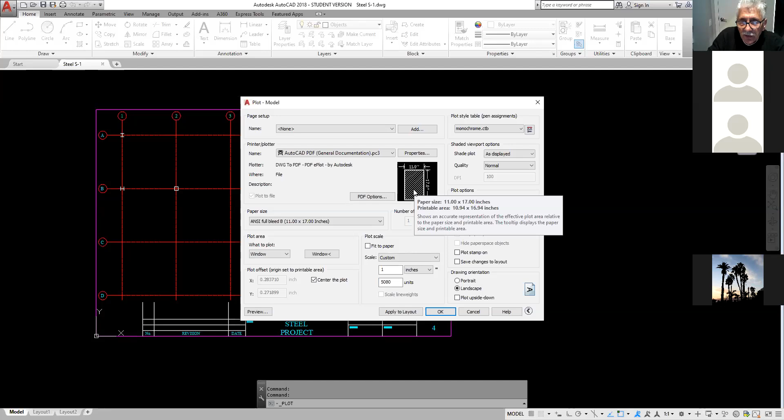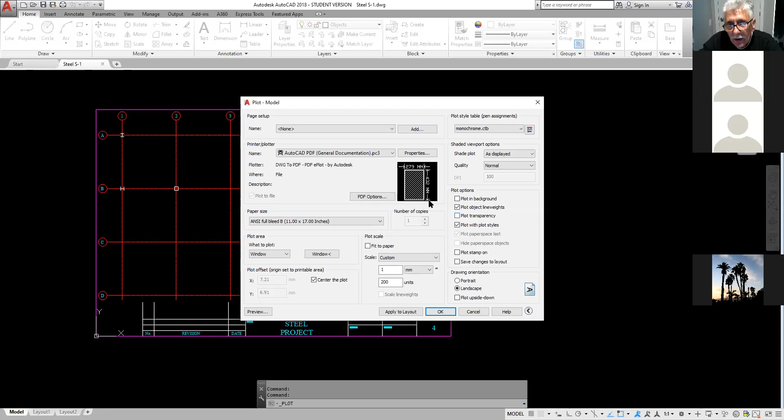Now, if I don't want to have it in inches, all I've got to do here is change this to millimeters, and I'm going to have it in millimeters. So my printable area is 277 millimeters in one direction and 430 in the other direction. Everybody sees that? That's what will eventually be used to print my drawing.

So that means that if I want to draw at a 1 to 200 scale, the 277 gets multiplied by 200 and the 430 gets multiplied by 200, and that should be what we call the limits of my drawing. So if I take 430 by 200, that's 86,000 in the x direction. And if I take the other one, 277, that's 55,400 in the y direction. So that's the limit of my drawing.

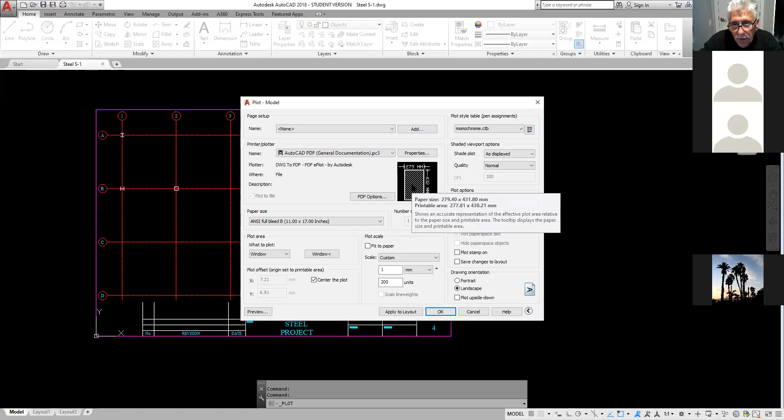I want to cancel. Now, if you notice here, if I put a distance here, from here to here, you'll notice that the x direction is 82,000 and the y is 53,000. So I know that when I get to a ledger or 11 by 17, that will fit on my paper because I set the limits to that.

Oh, okay, that's how you do it. Because this way, once I put this border here, Vincent, right? Once I put this border in here, I know that once I click from there to there and send it to my paper, it's going to fit at a scale of 1 to 200 because I am limiting my virtual space with my purple border. Oh, okay, that's what I didn't get. So you can't actually change the scale like when you're...

Yeah, you can. All you've got to do now is, for example, I'll do it here. So now this is good for 1 to 200. So you take that concept and you apply it to whatever you want to do your drawing with, like 1 to 10, because for the other two drawings, it's 1 to 10. So can you take the drawing you have right now and put it to 1 to 10? Yeah, we can do that. In other words, we can do that.

What I'll do is I'll just say copy. I'm going to... sorry about that. Okay, copy, I'll copy the whole thing. And this is what you should be doing, from here, and you just move it over here.

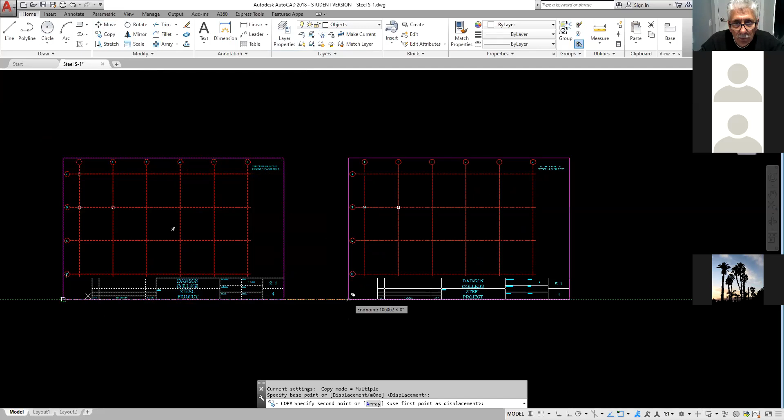Now, in other words, what you're saying is that you want your scale to go from 1 to 200 down to 1 to 10, is that it? Yep. You follow? So that means now that for every 1 millimeter of paper space, I'll only be putting 10 millimeters of what I'm actually drawing. You agree? I agree. So if I use the scale command...

If I take the scale command, and I take that as my base point, so what would be the scale? 1 to 10. What's 10 divided by 200?

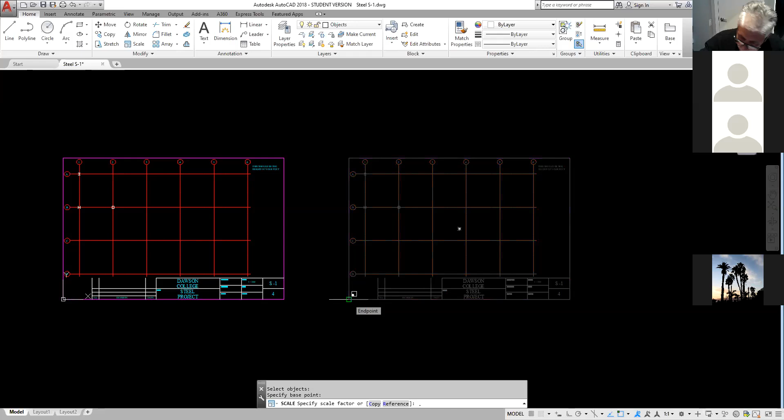0.05, so it's asking me for my specified scale factor, 0.05, right? So now when I draw in here, I'm drawing 1 to 10.

Shit, okay. I tried to follow, but doing that never worked. I think I was trying to put like 1 to 2, like 1 to 10.

I didn't put... okay, but now there's one more thing you have to modify. This is good for 1 to 10, but now all your annotation is for 1 to 200. So you're gonna have to create more dimensioning for your 1 to 10 scale, and how you do that is very simple.

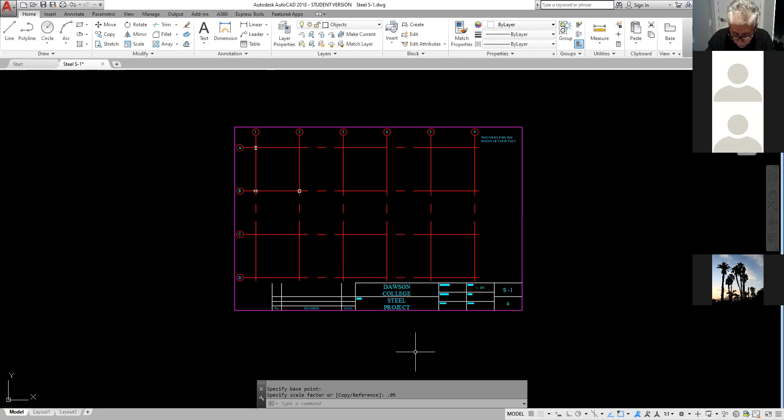What you do is, you understand now, for example, if I take the concept that I did before, I have 277 multiplied by 10, so therefore my limit should be 2,700 in one direction, 4,300 in the other direction. You follow what I'm saying? Because that's my printable scale, right?

Sorry to interrupt, but when you put in that 0.05 there, what did you write for this for the command to pop up? Well, I just scale my drawing. In other words, I use the scale command. All I did is the scale command.

In other words, I scaled this drawing down, because it's going to need less space in order for me to put the information I need into it. And now, for example, if I had a printable scale of 277 multiplied by 10, now all I need is a limit of 2,770 by 4,300, understand?

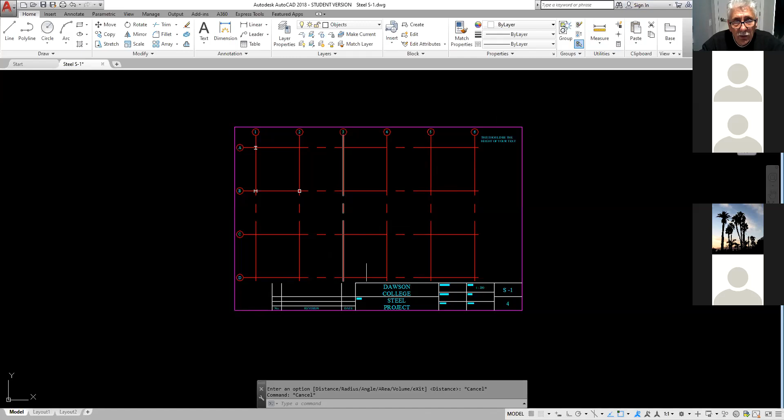And if I measure this now, distance from there to there, that's what I have. I have 2,600 by 4,100, understand? So now I can fit this. The other thing you have to do is, when you draw in here, you won't see it, because when you're drawing like here in AutoCAD, okay?

So can you basically finish your drawing on a 1 to 200 scale and then scale everything, like all the text and all the dimensions, back to 1 to 10? If you want, yeah, that would also work, instead of always changing the scale for the text, always changing the scale for the dimensions.

Well, exactly, but the problem is that when you're drawing 1 to 200 to a scale of 1 to 10, you understand, you're gonna have to remember that all your dimensions, you have to multiply them by 200 to draw them, and then you can scale them down to 1 to 10. Oh shit, you see the drawback to that? That's the only drawback to what you're saying.

Then you'd have to actually multiply everything by 200, and then when you scale it down, it will be to the right scale. But right now, this is the right scale for your sheet. Now, the only thing is that you're going to have to create a new dimension style. That's all you need to create, a new dimension style.

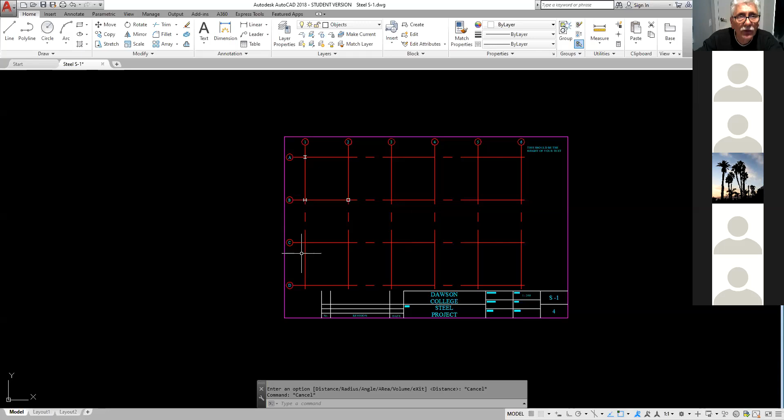So you're going to go to annotate, right? And you're going to go here. See, now this standard one here is what you're using for 1 to 200. So what you're going to do is create a new one. You're going to start with the standard, and copy that.

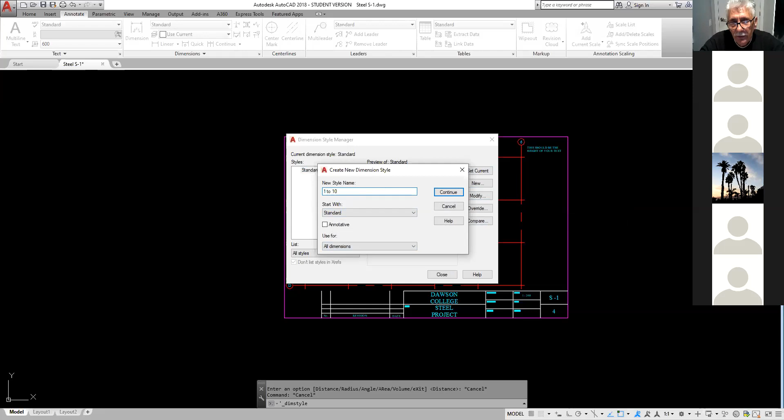Start with this, and then here, what I tend to do is I tend to put 1 to 10, so I know which one I'm talking about. So this is a 1 to 10 scale, whereas the other one is 1 to 200. I say continue, okay?

Now, here is where I come in and I modify the scale factor, in the primary units. This I don't have to modify, fit. The overall scale factor was 4,000, right? I'm using that. What's 4,000?

Divided by 200? Yeah, but then you have to multiply it by 10. So it's 200, right? Yep.

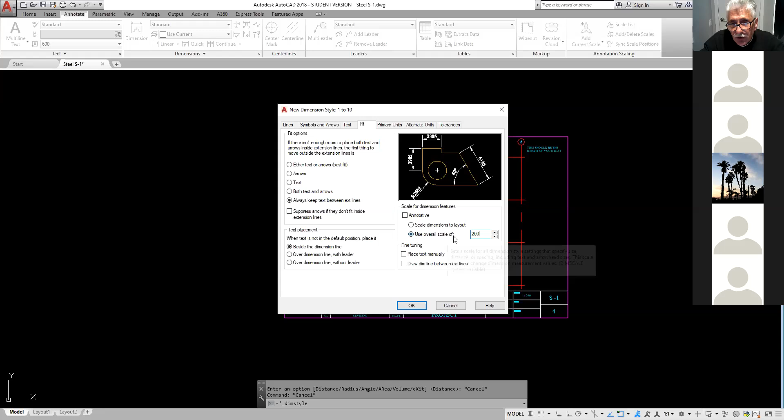Okay, once I change the overall scale factor, if I make this current and press OK, and come in here - I hope this works - and I do a linear dimension from there, you see how nice it is?

It's to the right scale. You follow? So that's all you have to do now, like modify - 80 millimeters and stuff, you can just put directly. And then all you got to make sure is that when you're on this drawing, you just go and change it to that dimension

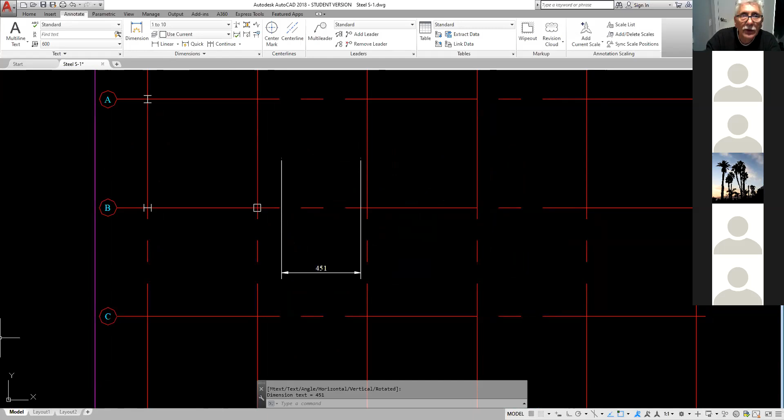style. Understand? So you pop this up. Now if you haven't done another drawing, 1 to 50, then you just keep going. Understand? So now you can draw 1 to 10, and you can dimension 1 to 10.

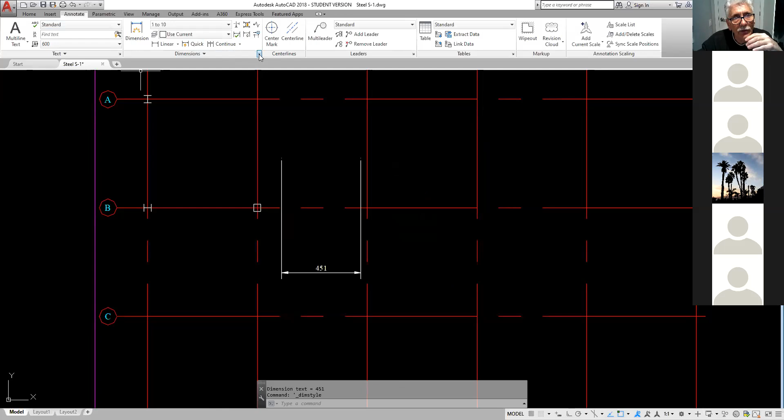Where did you click again for that dimension style manager? Well, that's right here, it's under annotate. It's under annotate, and then you flip out the dimension style here. Understand? So there was only one before.

So I say create a new one. Like if I want to create one for 1 to 50, I would create a new one, and I would go in there and modify just the overall scale factor. So all my arrowhead size, all my text size, everything stays the same.

Isn't that nice? Perfect. That's perfect. Isn't that easy? So for this, sir...

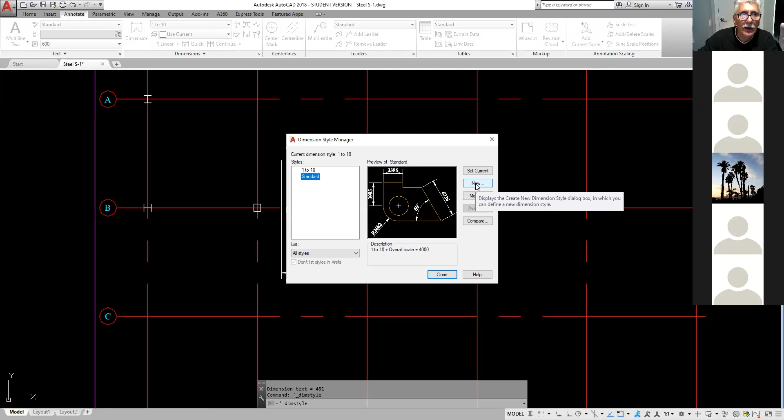When you go to print, you just send it - it's the purple border that you use. Now, exactly. Now, just to show you, let's say I'm printing this drawing here, I would do plot, right?

I don't have that here, so now I'm going to say PDF. PDF, let's go to PDF. PDF general, where's my PDF? I like using this one.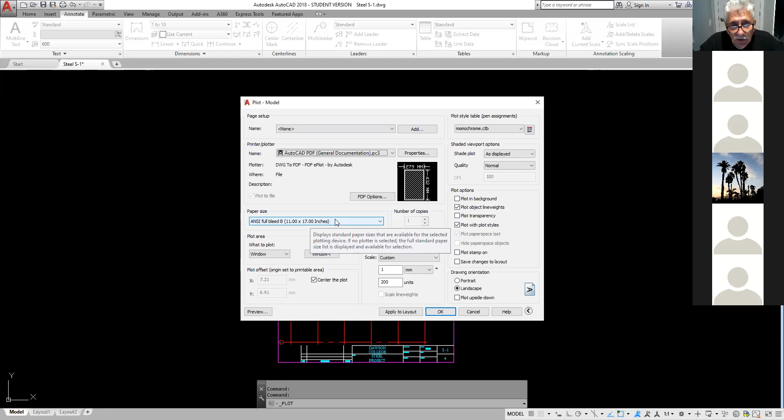PDF general, that's going to be my sheet size, right? I'm going to plot a window, from there to there. Then I'm going to center it, and I'm going to say my scale now is 1 to 10.

I'm going to make sure that's monochrome, that's okay, I'm going to ask for preview. Look at that, it fits on the 11 by 17.

Interesting, very good. What do you mean very good? This is basic, I'm impressed. No, I'm kidding. Oh, you're impressed? That's not how we learned it, sir, it was a whole different thing. You're impressed on my skills with AutoCAD?

No, it was just always a hassle when we had to print stuff. So always this actually made it so simple. Isn't this simple? Yeah, and guys, unfortunately, they took the drawing away from me last year.

You shouldn't, sir. I got it back for next year. I mean, I'm the one that's got the most experience in drawing in the department, and they don't give me the drawing course, go figure. Who did they give it to? Carmen, you did both drawing courses last year.

Yeah, I had a - no, never mind, I didn't have a course with them.

Anyway, so see how simple that is? And you do the same thing for wood. So for example, you have 1 in 50, and then when you want to do your drawing, you do the same concept. And if you don't remember, I'll do it again next week. Understand, when we're doing the drawings again.

Okay, well thanks a lot, that was really helpful, I can actually do my drawings now. And you like the way that the arrowheads and the scale and the text have all been adjusted by changing that overall scale factor. Yep.

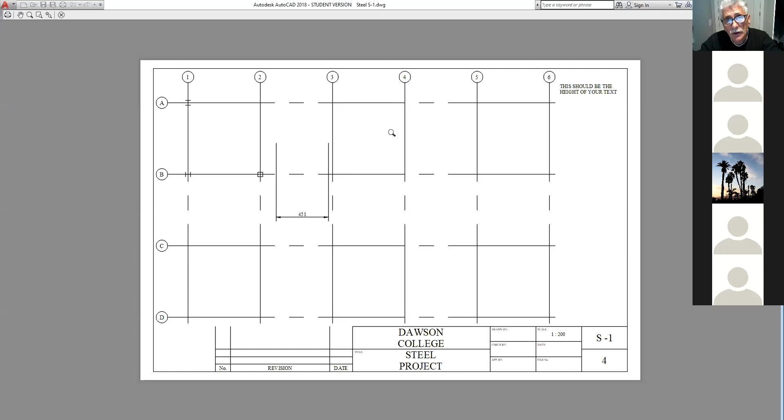Okay, so let me exit this. It was too small for the bubbles. Like you couldn't... No, see, no. Matt, look, let me explain to you bubbles once and for all, so this way you'll remember for the rest of your life. Okay? Yep. I'm gonna cancel this. Let me explain something to you, okay? I'm gonna annotate right here on my drawing.

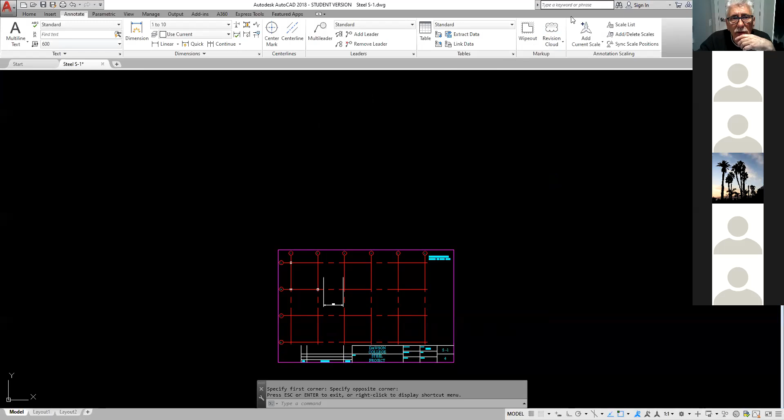Okay. Bubbles are very simple, okay? A bubble should not take more than 3/8 of an inch of your paper scale. Do you understand? Okay. That's imperial. And when you're doing metric, to make it simple, it should not take more than 10 millimeters.

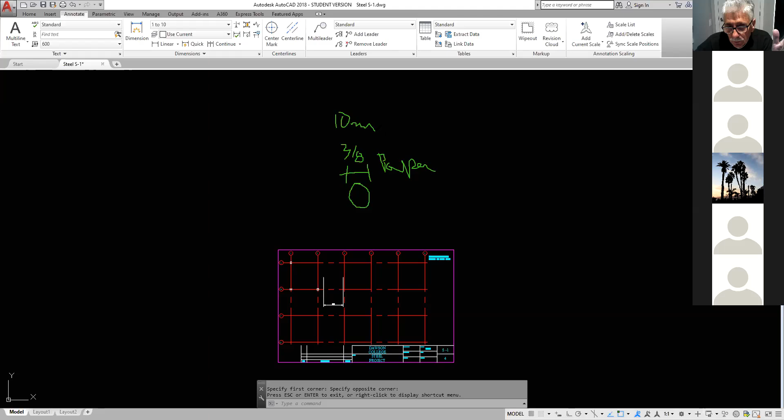You follow? After I printed my drawing on my paper, that circle should not measure more than 10 millimeters or 3/8 of an inch. That's what I mean by on the paper. So far, so good? Yep. Now, if I have a scale of 1 to 50, that means for every millimeter of paper, I got 50 millimeters on my drawing. So for a scale of 1 to 50, what should be the diameter of my bubble? 500.

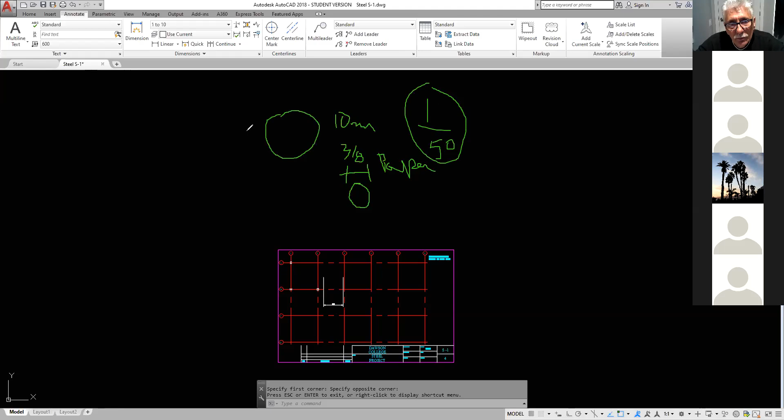So it's the same thing for what's the scale? Okay, so in other words, if I'm doing this in metric, if I put a 500 millimeter diameter and I'm plotting at 1 to 50, the final size on the paper will be 10 millimeters, and that should be the size of a bubble. So remember that: 10 millimeters paper scale for metric, 3/8 for imperial.

Now, when you're drawing at a quarter of an inch is equal to 1 foot, that means for every 1/4 of an inch, I'm taking up 1 foot of drawing space, right? Now, if I want 3/8, what would be the diameter of the bubble that I need to end up with a 3/8 inch diameter on my paper scale? Just do the proportions. I have no idea. 1 foot, a foot and a half, it's got to be an 18-inch diameter.

If I'm drawing 1/4 of an inch is equal to 1 foot, Mason, that means for 1 foot, I've taken up a quarter of an inch of paper. If I want to take up 3/8 of an inch of paper for the diameter, how much more is this? That's 12 inches, and that's 6 inches. So the diameter of my bubble has to be 1.5 feet. Because I did mine 2.5. It's way too big. If you hand that in, you're going to lose marks.

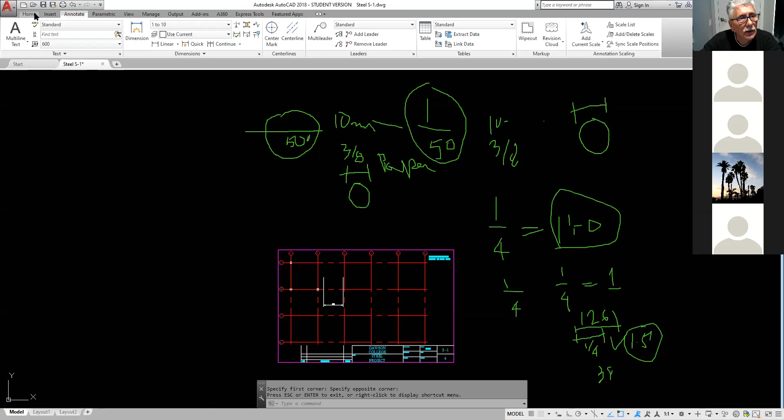In other words, when I go to Home, and when I do the radius command here, people always tend to take this one, and then they put 1.5 feet, so they end up with a 3-foot diameter. It's twice the size that they need. Now, here, this is what you want. If I was doing it at 1/4 inch scale, this here is imperial, right?

As a matter of fact, if I come here, this is 1 to 10. Do you agree we made this drawing 1 to 10, Mason? So if I go 1 to 10, and I have 10 millimeters, that means this diameter shouldn't be more than 100 millimeters. Agreed? Yep. Okay, so let me measure it.

Guess what? It's 100 millimeters. Look at the bottom of the screen. Yeah. Isn't that nice? Yep. Do you guys know how to justify your text? No. You don't know how to justify your text, okay?

So in other words, if I draw a circle here, okay, I'm gonna draw a circle, I don't care where it is, okay? Here's my circle. And now if I want my text to be right in the center of my circle, right? I do dtext, right? That's text. I'm sorry, it's taking a while, okay? Now, before I do anything, if you look at the command bar, it says justify.

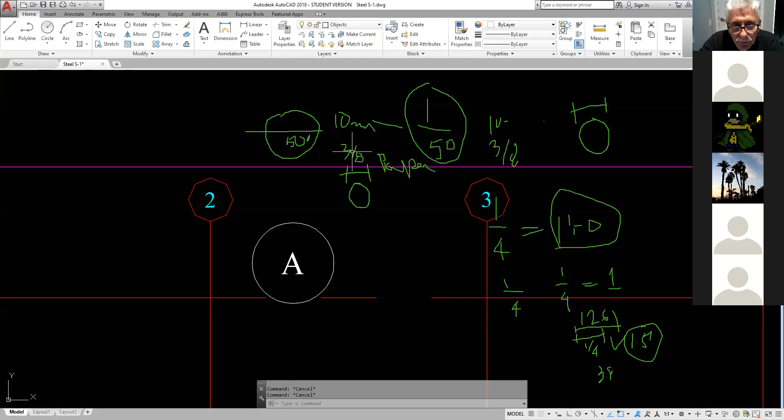Okay. And you know, to change it on your drawing, you had a diameter of how much? Before I changed it, I had a diameter of 2.5 feet. Now I have a diameter of 1.5 feet, like you. I hope you use the scale command to change it and not redraw it. Yeah, I just redrew it and copied one for all the other ones. Okay, all I'm saying is that you could use the scale command and you would have the same result. Yeah.

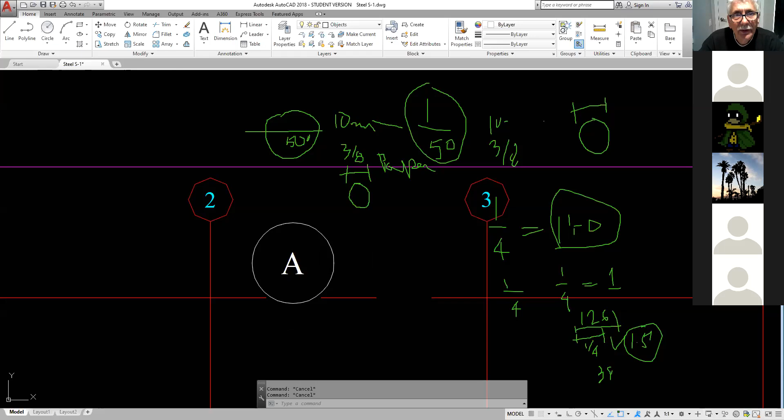Okay, anyways, that's the problem with AutoCAD. There's 18 ways to pick your nose. You always try to find the fastest way to do it. Love AutoCAD. It's actually really fun. Like, I don't mind doing it. There's some stuff that I hate doing, but it's not too bad.

Okay, so guys, any more questions that we can clarify at this point here?

So there you go. And if you don't remember how to do this, I'll repeat it next week because I have AutoCAD on my desktop here. It's not a problem. And I hope today was helpful. So...

Yes. When you're drawing the welds, what line weight do you use? Oh, that's already all set up for you. Like if you go to the Properties Manager, okay, you have nothing to worry about. When I set up the prototype drawing, as long as you're drawing in the right layer, then you're gonna have the right line width. So if you open up the Layers Manager here, okay, I'm sorry, Mike, okay, and if

you look, for example, when you're doing your text, you do it on the text layer, the line weight is already set for you here. Okay, so this is all set for you here. You don't have to worry about that. For example, your center lines, those have to be in the very background of your drawing. So I have a very small line weight. So all of your line weights have already been set up for you here.

And what I do, Jared, you're the one that asked me a question? Yeah. When I do an AutoCAD drawing, believe it or not, I start with objects and I draw all my objects. And I do it in one color, so I know that I'm on that layer. Then when I move to another thing on the drawing, for example text, I change my layer to text and I do all my text. Then if I do all my dimensioning, I change and I do all my dimensioning, understand?

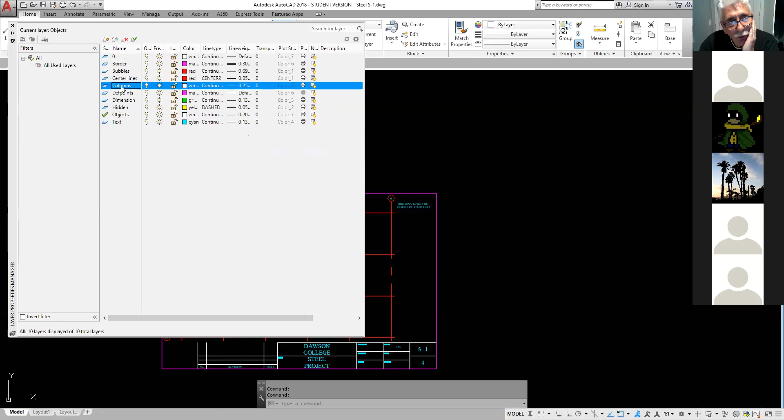have it here. Yeah, you see here, I've created two layers, one for columns and one for objects, okay? Because when you're doing a structural steel drawing, the columns should be a little heavier than your object lines. So when you do your columns, make sure you do them on columns, and they're going to be drawn at 0.25 millimeters line thickness, and when you do your objects, it's going to be at 0.20. So there's going to be a slight difference in the line weight, and that's going to make your drawing look much nicer.

So when you're doing your roof plan, put all your columns on your column layer, then change layers, and then start drawing all your objects on your object layer. And so, okay. So there you go. And like you notice, guys, I don't play with more than three or four line weights.

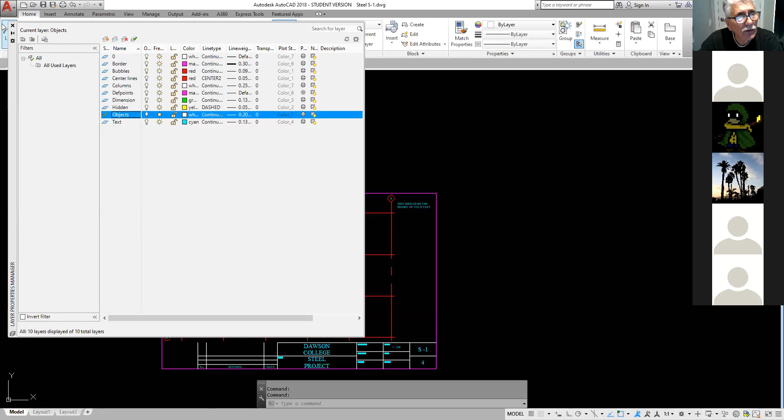In my days, since we had line weights, at the same time we would even play with the ink that we used to plot, because if we used a yellow ink, it would be a very dark line. If we used a blue ink, we'd get a very light line. So not only would we plot with different line weights, but we'd also try to plot with different line intensities. But this was way back when we had pen plotters, understand? So this is all old school, not even around anymore.